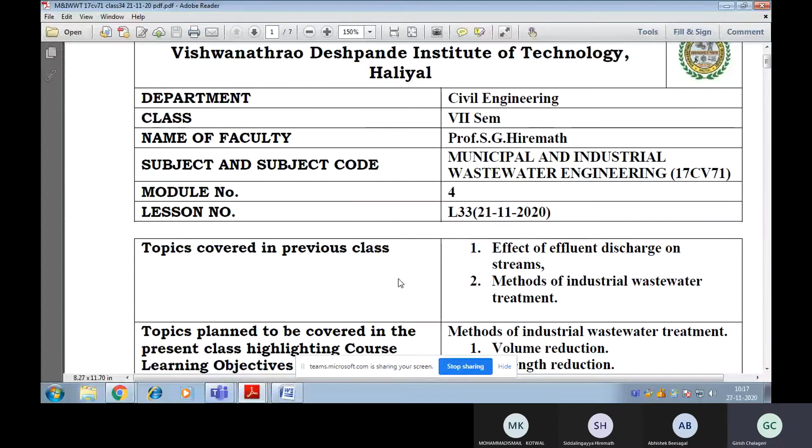So let me start with the topics which we have covered in the last online class. We have discussed the topics which I have posted as notes in your WhatsApp group. In the last class, we discussed the effect of effluent discharge on streams as well as methods of industrial wastewater treatment, that means what is the significance, why the industrial wastewater has to be treated, etc. Today we'll discuss two methods of industrial wastewater treatment: first is volume reduction and second is strength reduction.

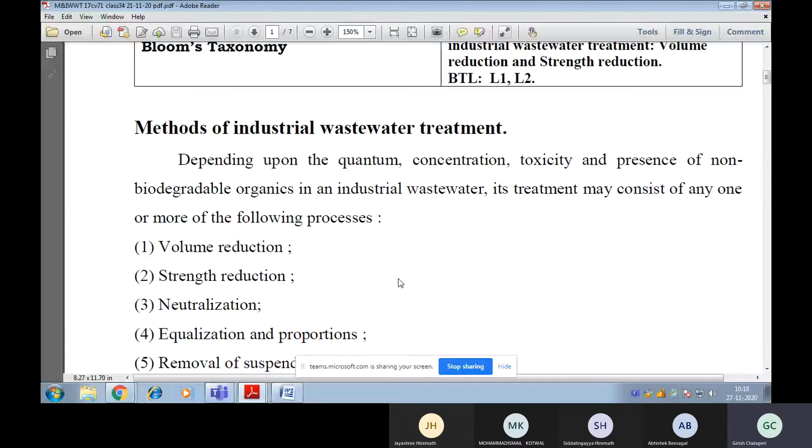Now in detail, we'll discuss the methods of industrial wastewater treatment. Depending upon the quantum, concentration, toxicity and presence of non-biodegradable organics in an industrial wastewater, its treatment may consist of any one or more of the following processes: first, volume reduction; second, strength reduction; third, neutralization; fourth, equalization and proportioning; fifth, removal of suspended solids; sixth, removal of colloidal solids; seventh, removal of inorganic dissolved solids; eighth, removal of organic dissolved solids.

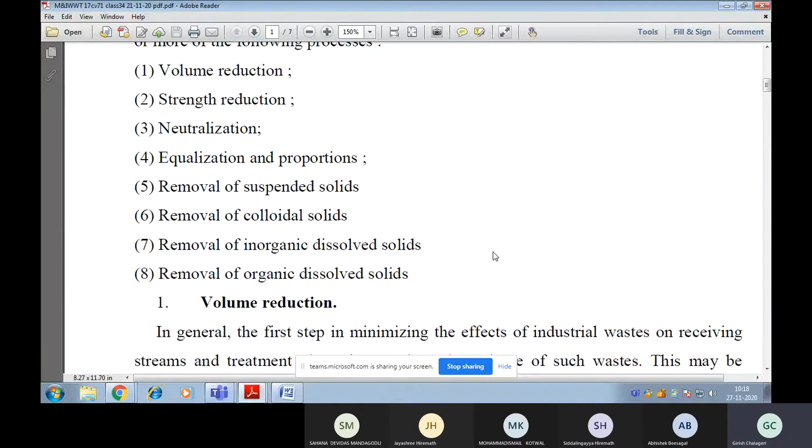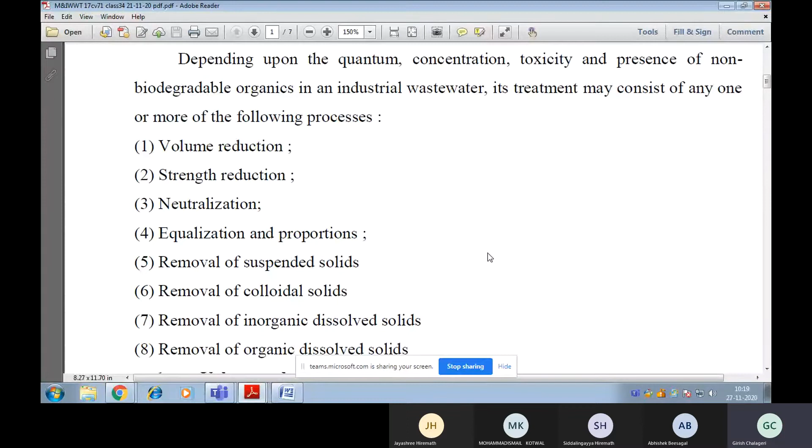As per your syllabus, we have to discuss in detail all these methods of industrial wastewater treatment. As I told you, today we'll discuss two methods, that is volume reduction and strength reduction. Come to volume reduction. In general, the first step in minimizing the effects of industrial waste on receiving streams and treatment plants is to reduce the volume of such waste.

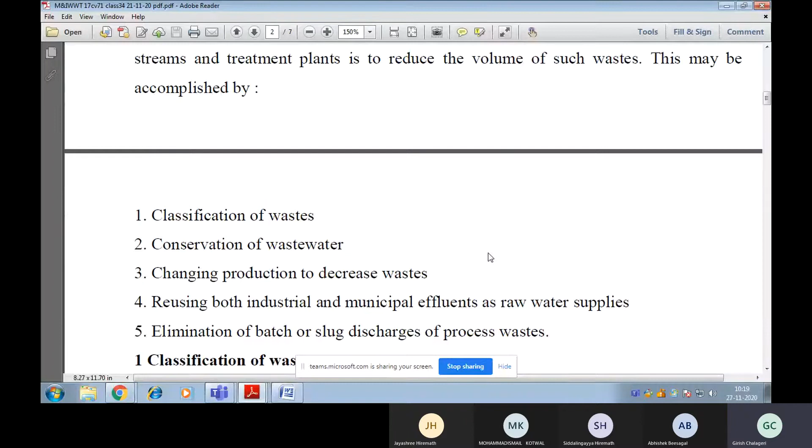This may be accomplished by: first, classification of waste; second, conservation of wastewater; third, changing production to decrease waste; fourth, reusing both industrial and municipal effluents as raw water supplies; fifth, elimination of batch or slug discharges of process wastes. Now we'll discuss in brief all these methods. So come to the first one, that is classification of waste.

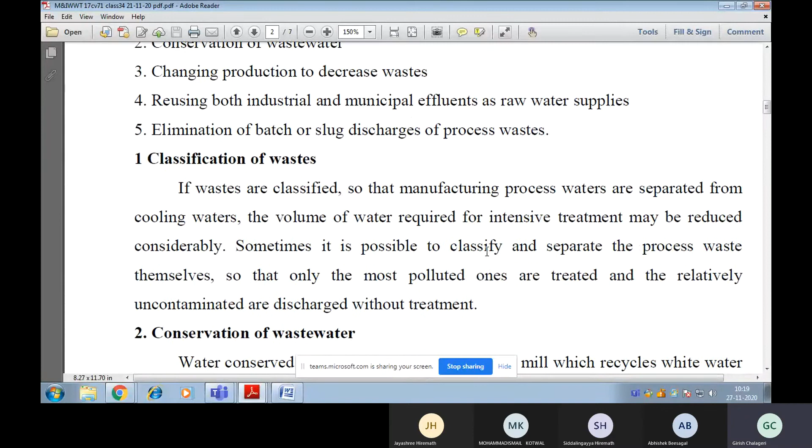If wastes are classified so that the manufacturing process waters are separated from cooling waters, the volume of water required for intensive treatment may be reduced considerably. Sometimes it is possible to classify and separate the process wastes themselves, so that only the most polluted ones are treated and the relatively uncontaminated are discharged without treatment.

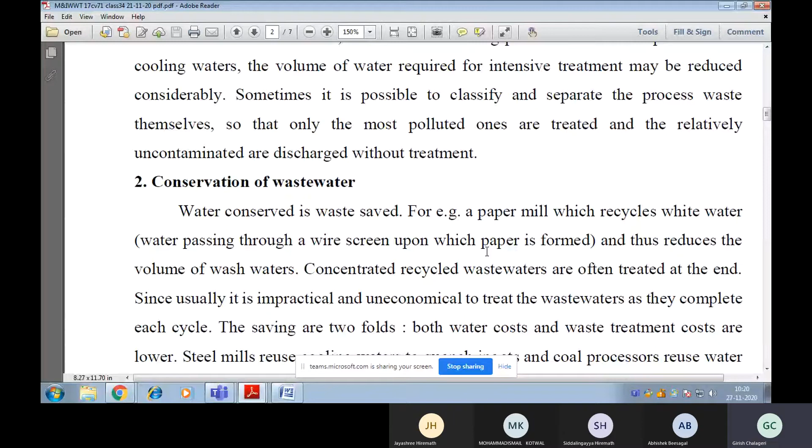Next one is conservation of wastewater. Water conserved is waste saved. For example, a paper mill recycles white water, that is, water passing through a wire screen upon which paper is formed, and thus reduces the volume of wash waters. Concentrated recycled wastewaters are often treated at the end, since usually it is impractical and uneconomical to treat the wastewater as they complete each cycle. The savings are twofold. Both water costs and waste treatment costs are lower.

Steel mills reuse cooling waters to quench ingots, and coal processors reuse water to remove dirt and other non-combustible materials from coal. Now, the third method to reduce the volume is changing production to decrease waste.

Yes, Jayashree Hiremath. Yes, sir. Yeah, is it audible clearly? Yes, sir. Okay, then. Let me continue.

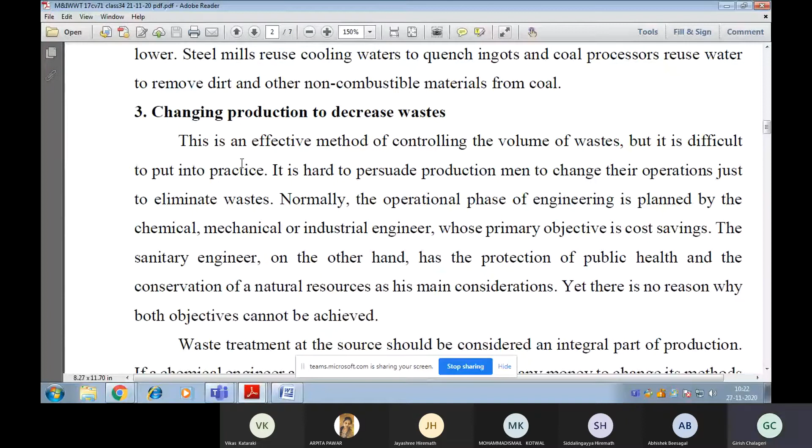So we were discussing volume reduction by changing production to decrease waste. This is an effective method of controlling the volume of waste, but it is difficult to put into practice. It is hard to persuade production men to change their operations just to eliminate waste. Normally, the operational phase of engineering is planned by the chemical, mechanical, or industrial engineer, whose primary objective is cost savings. The sanitary engineer, on the other hand, has the protection of public health and the conservation of natural resources as his main consideration. Yet, there is no reason why both objectives cannot be achieved.

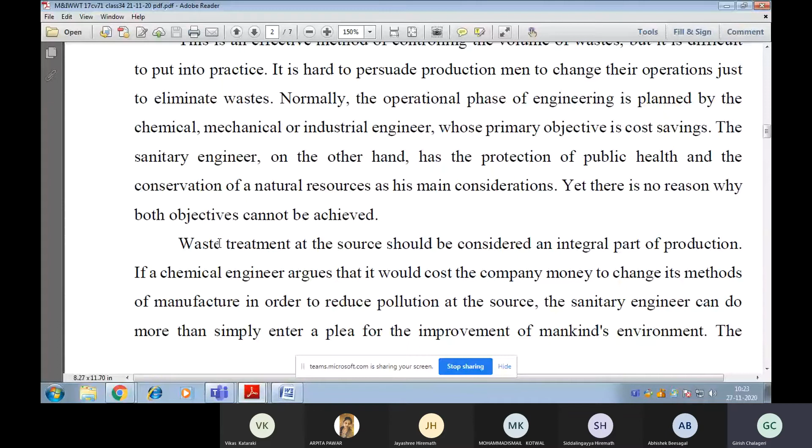Waste treatment at the source should be considered an integral part of production. If it costs the company money to change its method of manufacture in order to reduce pollution at the source, the sanitary engineer can do more than simply enter a plea for the improvement of mankind's environment. The reduction in the amount of sodium sulfite used in dyeing or sodium cyanide used in plating and of other chemicals used directly in production has resulted in both reduction in quantity of wastewater and saving of money.

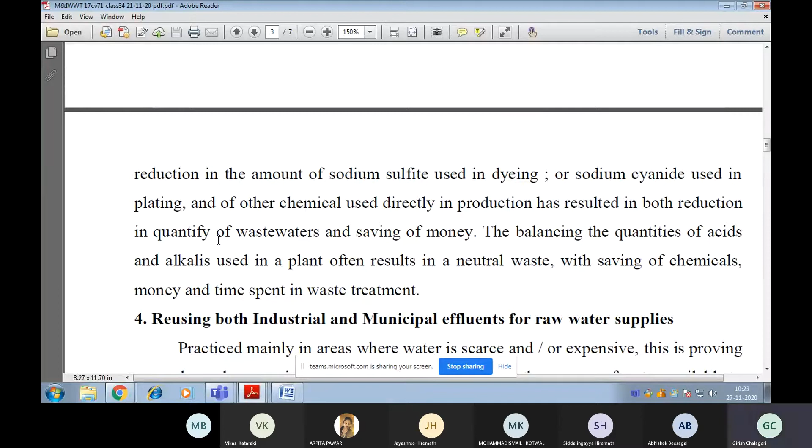Balancing the quantities of acids and alkalis used in the plant often results in neutral waste with saving of chemicals, money and time spent in waste treatment. The fourth method of reducing the volume is reusing both industrial and municipal effluents for raw water supplies.

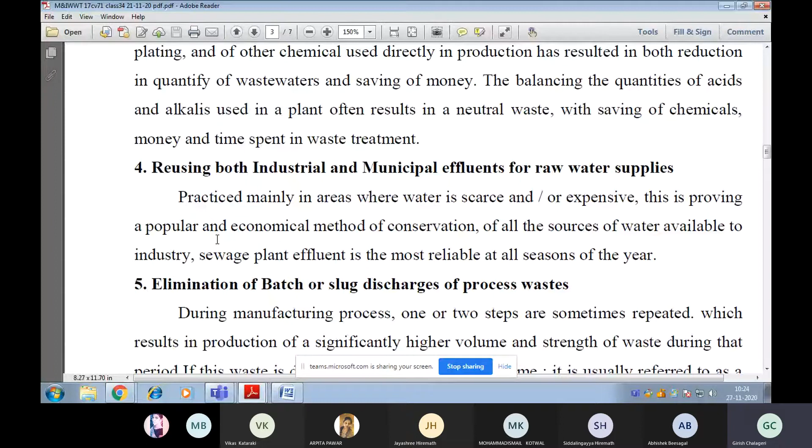It is practiced mainly in areas where water is scarce and or expensive. This is proving a popular and economical method of conservation. Of all the sources of water available to industry, sewage plant effluent is the most reliable at all seasons of the year.

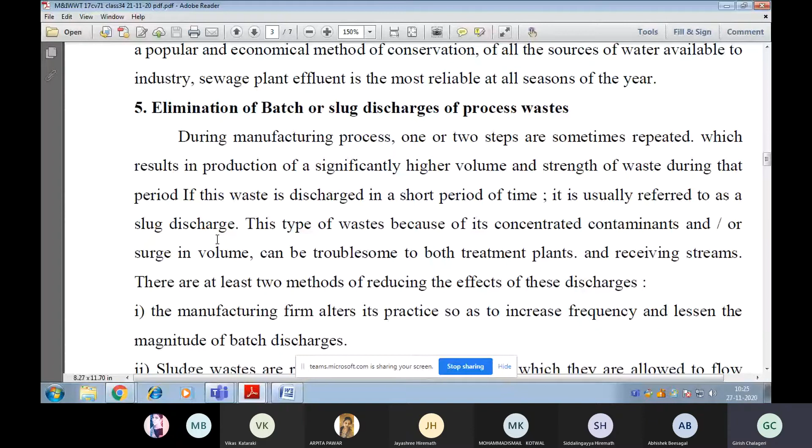Fifth method of reducing the volume is elimination of batch or slug discharges of process waste. During manufacturing process, one or two steps are sometimes repeated, which results in production of a significantly higher volume and strength of waste during that period. If this waste is discharged in a short period of time, it is usually referred to as a slug discharge. This type of waste, because of its concentrated contaminants and or surge in volume, can be troublesome to both treatment plants and receiving streams.

There are two methods of reducing the effects of these discharges. First, the manufacturing firm alters its practice so as to increase the frequency and lessen the magnitude of batch discharges. Secondly, slug wastes are retained in holding basins from which they are allowed to flow continuously and uniformly over an extended period. This particular period may be considered as 24 hours.

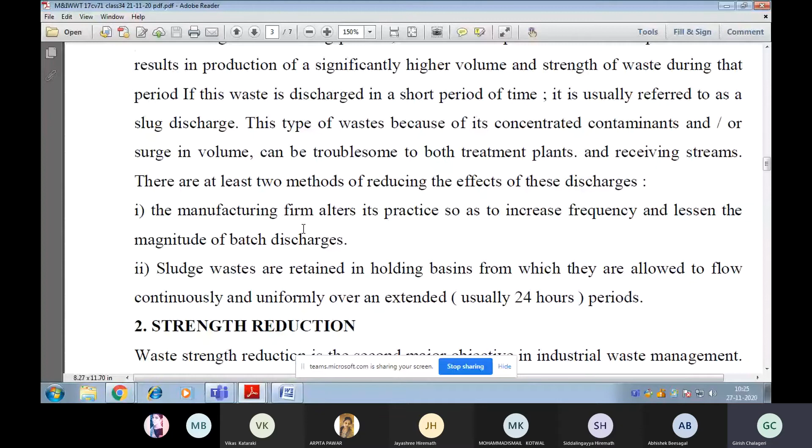So now come to the next method of treating the industrial wastewater, that is strength reduction. Waste strength reduction is the second major objective in industrial waste management. The strength of the waste can be reduced by the following methods. First is process change. Second is equipment modification. Third is segregation of waste.

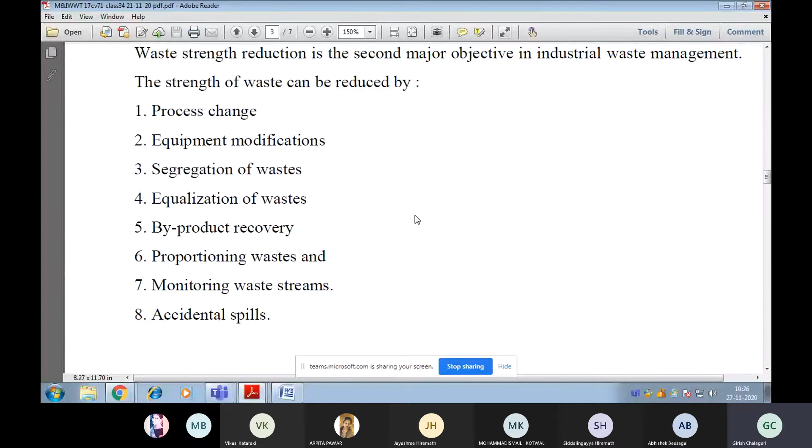Fourth is equalization of waste. Fifth is byproduct recovery. Sixth is proportioning waste. Seventh is monitoring waste streams. Eighth is accidental spills. Now we'll discuss in brief about all these methods of reducing the strength. As I told you, the first method is process change.

Let's have a break. Wait. Now, yes, Arpita Pawar. Yes, sir. Is it audible? Yes, clearly, sir. Okay then. Let me continue.

Okay, so we are discussing the first method of reducing the strength of industrial wastewater, that is process change. Many industries have resolved waste problems through process change, for example, textile and metal fabricating industries. Textile finishing mills are faced with a problem of disposal of highly polluted waste from sizing, desizing, and dyeing processes. Starch has been traditionally used as a sizing agent. This starch, after hydrolysis, becomes a major source of waste pollutants.

A new substitute for starch, carboxymethyl cellulose, has been developed to solve the above problem, which has reduced BOD value significantly. In the metal plating industry, several changes in the process have been suggested to eliminate or reduce cyanide strength. First is change from copper cyanide plating solution to acid copper solution. Second is replace the copper cyanide strike before the copper bath with a nickel strike. Third is substitute H3PO4 for H2SO4 in pickling of steel.

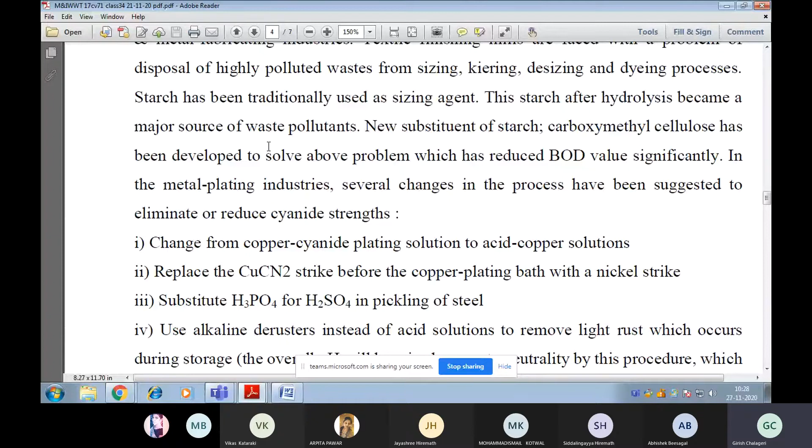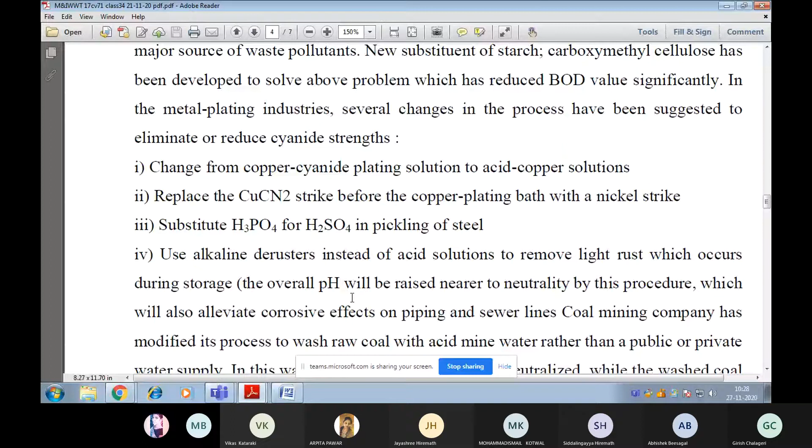Now, fourth is use alkaline derusters instead of acid solutions to remove light rust which occurs during storage. So the overall pH will be raised nearer to neutrality by this process, which will also alleviate corrosive effects on piping and sewer lines. A coal mining company has modified its process to wash raw coal with acid mine water rather than a public or private water supply. In this way, the mine drainage waste is neutralized, while the washed coal is free from any impurities.

The second method of reducing the strength of the wastewater is done by modifying the equipment, or equipment modification. With this also we can reduce the strength of the industrial wastewater. Changes in equipment can effect a reduction in the strength of the waste, usually by reducing the amounts of contaminants entering the waste stream. For example, in pickle factories, screens placed over the drain lines in the tanks prevent the escape of seeds and pieces of vegetables and fruits, which add to the strength and density of waste. Similarly, traps on the discharge pipeline in poultry plants prevent emission of feathers and pieces of fat.

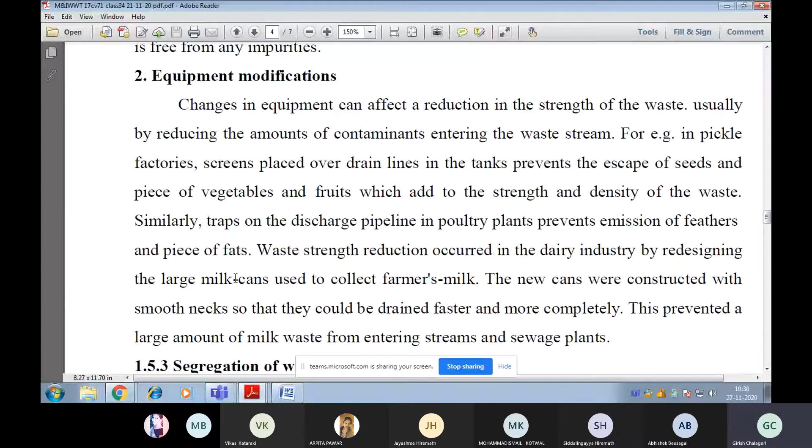Waste strength reduction occurred in the dairy industry by redesigning the large milk cans used to collect farmers' milk. The new cans were constructed with smooth necks so that they could be drained faster and more completely. This prevented a large amount of milk waste from entering streams and sewage plants. And third is segregation of waste. Using this also we can reduce the strength.

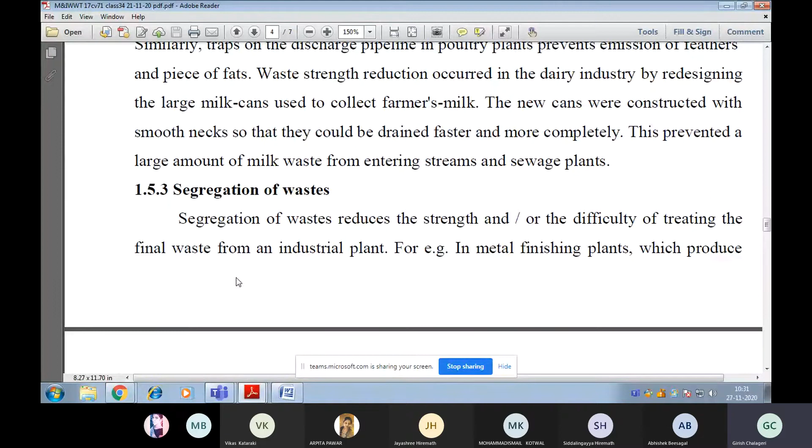Segregation of waste reduces the strength and or the difficulty of treating the final waste from an industrial plant. For example, in metal finishing plants, which produce waste containing both chromium and cyanide as well as other metals, it is necessary to segregate the cyanide bearing waste, make them alkaline, and oxidize them. The chromium waste, on the other hand, have to be acidified and reduced.

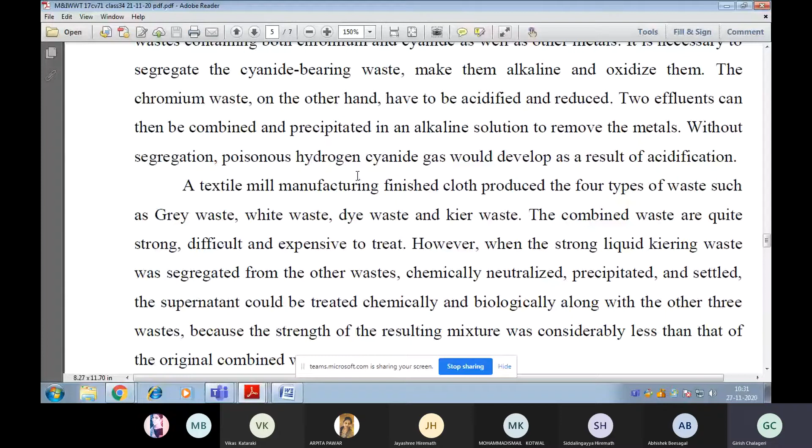The two effluents can then be combined and precipitated in an alkaline solution to remove the metals. Without segregation, poisonous hydrogen cyanide gas would develop as a result of acidification.

A textile mill manufacturing finished cloth produces four types of waste, such as grey waste, white waste, dye waste, and kier waste. The combined waste are quite strong, difficult, and expensive to treat. However, when the strong liquid kiering waste was segregated from the other waste, chemically neutralized, precipitated, and settled, the supernatant could be treated chemically and biologically along with the other three waste because the strength of the resulting mixture was considerably less than that of the original combined waste.

So this is how to reduce the strength of the industrial wastewater. The next method to reduce the strength is equalization of waste. The main objectives of equalization are stabilization of pH, BOD, and settling of solids and heavy metals. Plants which have many products from a diversity of processes prefer to equalize their waste. This requires holding basins for a certain period of time, depending on the time taken for the repetitive processes in the plant. For example, if a manufactured item requires a series of operations that take 8 hours, the plant needs an equalization basin designed to hold the waste for that 8 hour period.

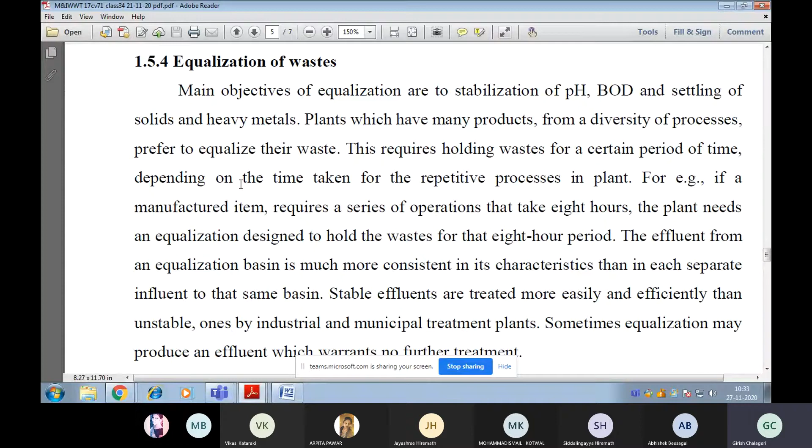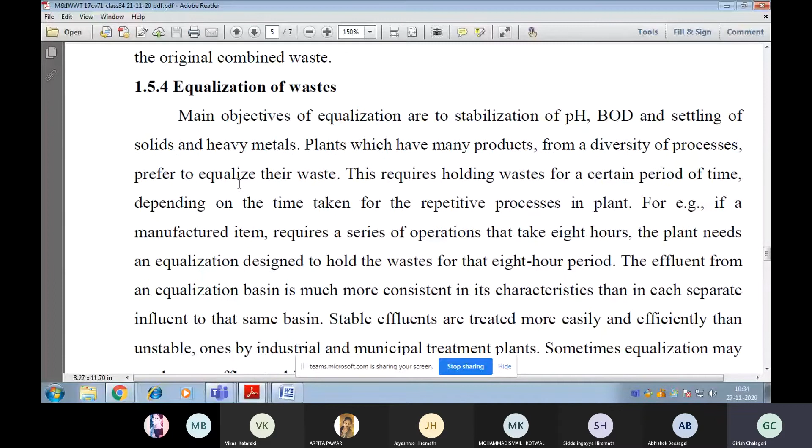The effluent from an equalization basin is much more consistent in its characteristics than each separate influent to that same basin. Stable effluents are treated more easily and efficiently than unstable ones by industrial and municipal treatment plants. Sometimes equalization may produce an effluent which warrants no further treatment. Now, we'll discuss equalization of waste in detail in the next class.

The fifth method used to reduce the strength of the industrial wastewater is byproduct recovery. This is the utopian aspect of industrial waste treatment, the one phase of this entire problem which may lead to economic gains. The industrial management should consider the possibility of building a recovery plant which will produce a marketable byproduct and at the same time solve a troublesome waste problem.

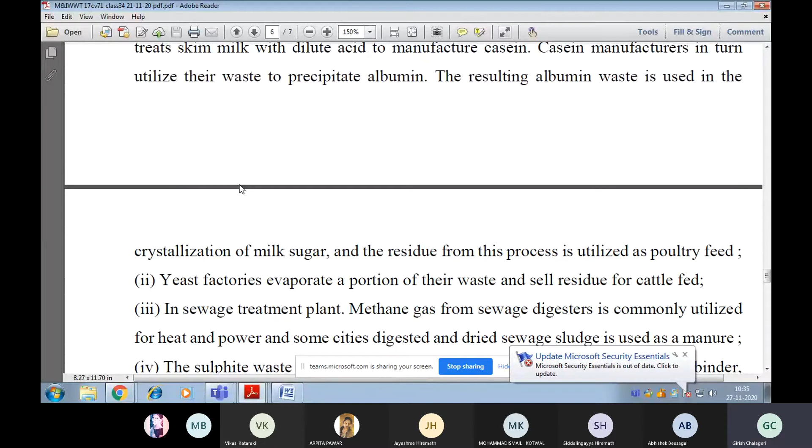For example, the dairy industry treats skim milk with dilute acid to manufacture casein. Casein manufacturers in turn utilize their waste to precipitate albumin. The resulting albumin waste is used in the crystallization of milk sugar, and the residue from this process is utilized as poultry feed. Second, yeast factories evaporate a portion of their waste and sell the residue for cattle feed.

Third, in sewage treatment plants, methane gas from the sewage digester is commonly utilized for heat and power, and in some cities digested and dried sewage sludge is used as a manure. The sulfite waste liquor byproducts from paper mills are used in fuel, road binder, cattle fodder, fertilizer, insulating compounds, and in production of alcohol and artificial vanillin.

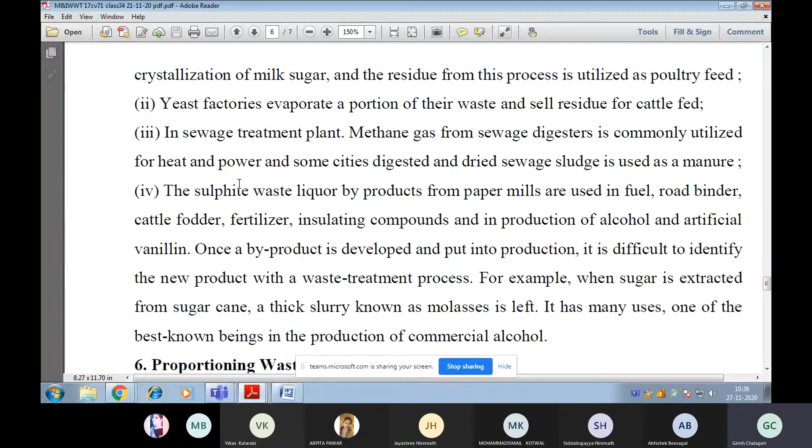Once a byproduct is developed and put into production, it is difficult to identify the new product with a waste treatment process. For example, when sugar is extracted from sugarcane, a thick slurry known as molasses is left. It has many uses, one of the best known being the production of commercial alcohol, that is ethyl alcohol.

The next method of reducing the strength is proportioning waste. By proportioning its discharge of concentrated waste into the main sewer, a plant can often reduce the strength of its total waste to the point where it will need a minimum of final treatment or will cause the least damage to the stream or treatment plant. We'll discuss it in detail in the subsequent chapters of the module.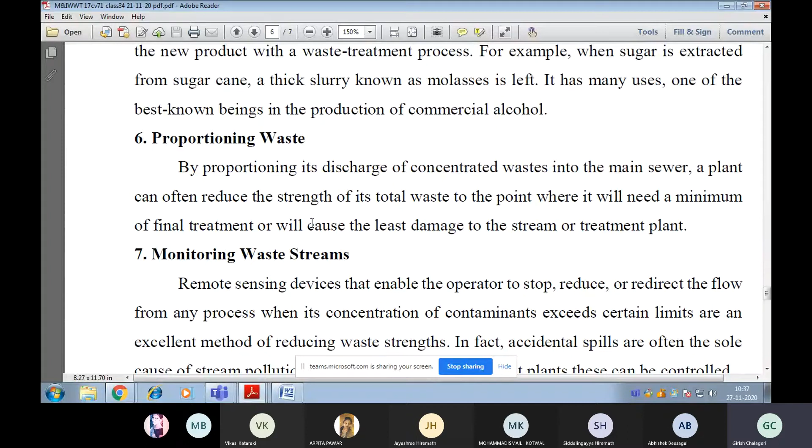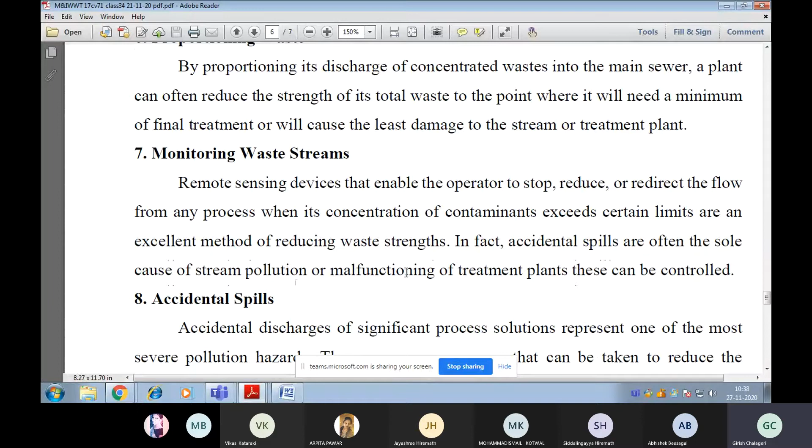So the seventh method of reducing the strength is monitoring waste streams. Remote sensing devices that enable the operator to stop, reduce, or redirect the flow from any process when its concentration of contaminants exceeds certain limits are an excellent method of reducing waste strength. In fact, accidental spills are often the sole cause of stream pollution or malfunctioning of treatment plants. These can be controlled.

The eighth method of reducing the strength is accidental spills. Accidental discharges of significant process solutions represent one of the most severe pollution hazards. There are some measures that can be taken to reduce the likelihood of accidents and their severity when and if they occur. Some suggestions for general use include:

First, make certain that all pipelines and valves in the plant are clearly identified. Secondly, allow only certain knowledgeable persons to operate these valves. Third, install indicators and warning systems for leaks and spills. Fourth, provide for detention of spilled wastewater in holding basins or lagoons until proper waste treatment can be accomplished.

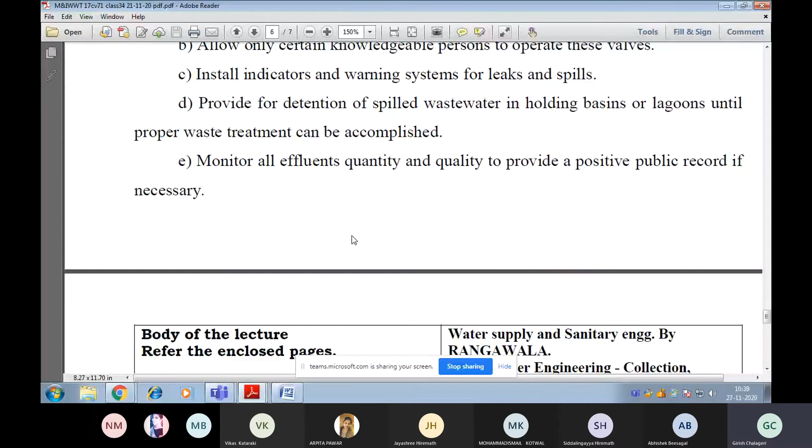Last, monitor all effluents' quantity and quality to provide a positive public record if necessary. These notes which we have discussed are prepared by referring to these references. You will get the copies on the net or in our library. Go through these books if you want more information about the topics I have discussed.

Now, what is the significance of these topics? These topics are very important in sanitary engineering, in municipal services, and also when working as a consulting environmental engineer. Questions may be asked like this: what advantage do we get by reducing the waste volume? What do you mean by strength reduction? Why should we use it? Such questions may be asked in the examination.

Now, Manjunath, yes, Bhimanalli. Manjunath, Manjunath SB. Yes, Sudha. Hello. Yes, sir. Is it audible? Yes, sir. Audible, sir. Okay then. Let me continue.

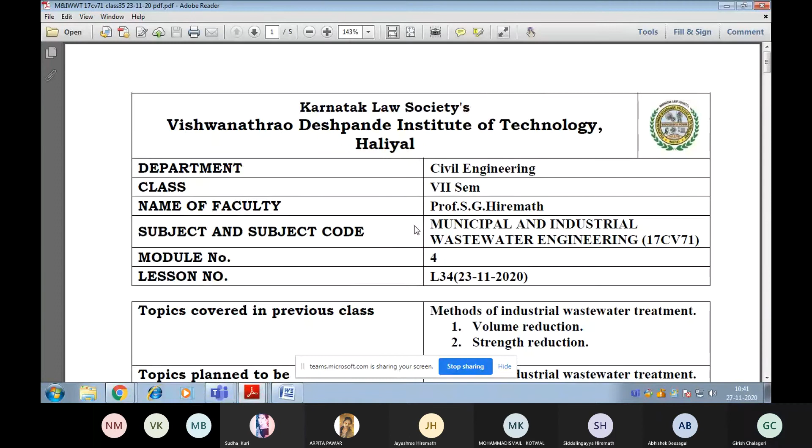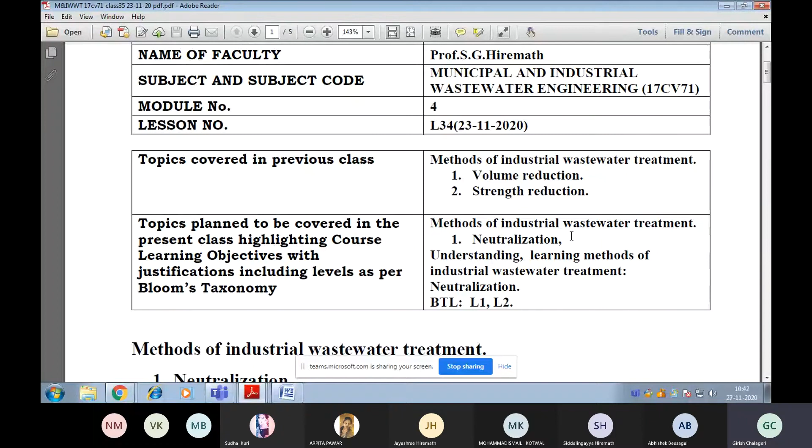As I told you, in the notes posted on 23/11/2020 we have discussed one of the methods of industrial wastewater treatment, that is neutralization. You can go through the notes posted on 23/11/2020. In the previous class we covered volume reduction and strength reduction. As we have only one online class per week, I will discuss the notes posted in the WhatsApp group over the last 3 to 4 classes. Today we'll discuss another method of treating industrial wastewater, that is neutralization.

Acid or alkaline waste should not be discharged without treatment into a receiving stream. There are many acceptable methods for neutralizing excess acidity or alkalinity of wastewater: first, mixing wastes; second, limestone treatment for acid waste; third, lime slurry treatment for acid waste; fourth, caustic soda treatment for acid waste; fifth, waste boiler flue gas; sixth, carbon dioxide treatment for alkaline waste; seventh, producing carbon dioxide in alkali waste; and sulfuric acid treatment for alkaline waste.

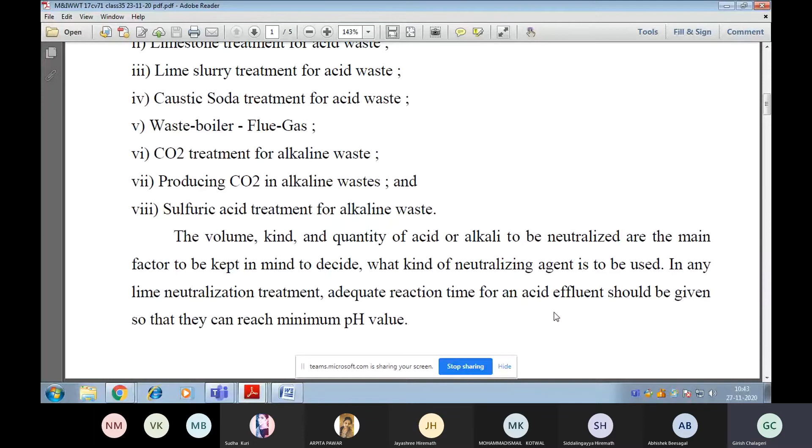The volume, kind, and quantity of acid or alkali to be neutralized are the main factors to keep in mind when deciding what kind of neutralizing agent is to be used. In any lime neutralization treatment, adequate reaction time should be given for an acid effluent so that it can reach the minimum pH value. Now we'll discuss in brief all these methods of neutralization.

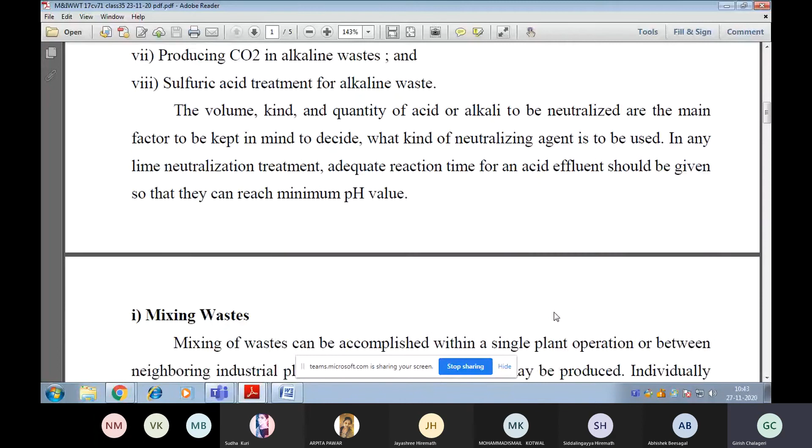The first one is mixing wastes. Mixing of wastes can be accomplished within a single plant operation or between neighboring industrial plants. Acid and alkali wastes may be produced individually within one plant, and proper mixing of these wastes at the appropriate time results in neutralization. For example, if one plant produces an alkaline waste which can be pumped conveniently to an area adjacent to a plant discharging an acid waste, an economical and feasible system of neutralization results for each plant.

The second one is limestone treatment for acid waste. In this method, acid wastes are passed through beds of limestone, that is calcium carbonate, at a rate of about 1 gallon per minute per square foot, that is 1 GPM per square foot. Neutralization takes place with the following reaction: calcium carbonate reacts with sulfuric acid, converting into calcium sulfate and H2CO3. This reaction will continue as long, just a second.

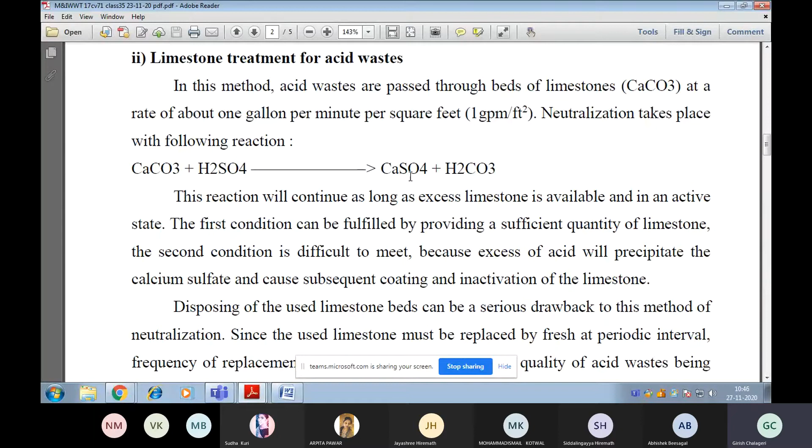inactivation of the limestone. Disposing of the used limestone beds can be a serious drawback to this method of neutralization, since the used limestone must be replaced by fresh at periodic intervals, frequency of replacement depending on the quantity and quality of acid waste being passed through a bed. When there are extremely high acid loads, foaming may occur, especially if organic matter is also present in the waste.

Third method of neutralization is lime slurry treatment for acid waste. Mixing acid waste with lime slurries is an effective procedure for neutralization. The reaction is similar to that obtained with limestone beds, but the advantages of using lime slurry over limestone beds are: first, in this case lime is used up continuously because it is converted to calcium sulfate, which is carried out in the waste.

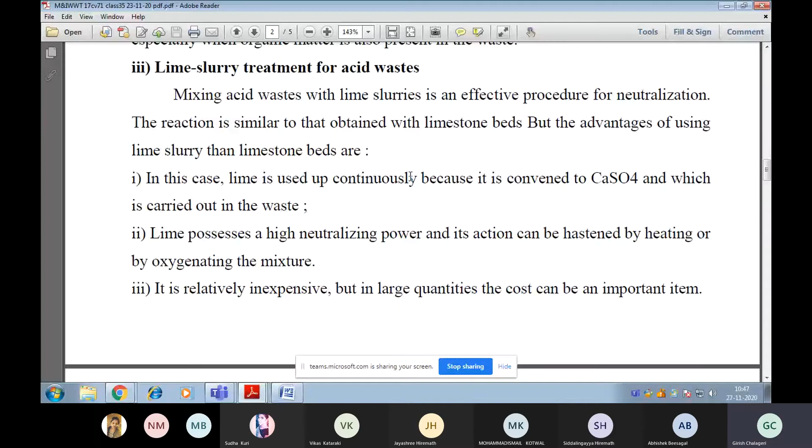Second, lime possesses a high neutralizing power and its action can be hastened by heating or by oxygenating the mixture. Third, it is relatively inexpensive, but in large quantities the cost can be an important item.

Neutralization of nitric and sulfuric acid waste in concentrations up to about 1.5%, that is in case of sulfuric acid, H2SO4, was accomplished satisfactorily by using a burned dolomite stone containing 47.5% calcium oxide, 34.3% magnesium oxide and 1.8% calcium carbonate.

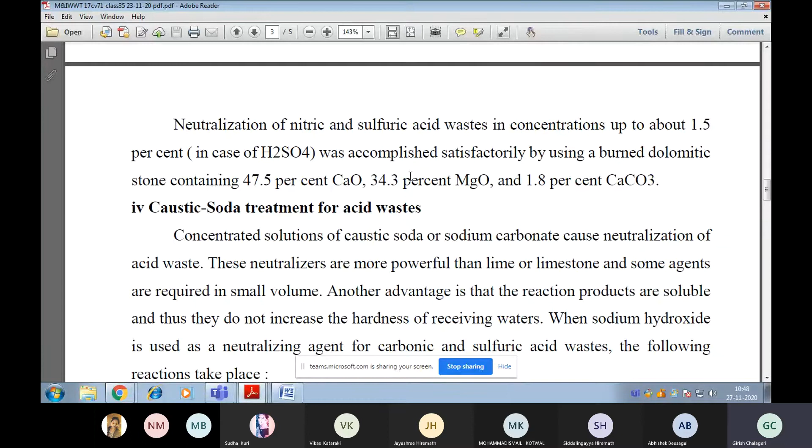So next method of neutralization is caustic soda treatment for acid waste. Concentrated solutions of caustic soda or sodium carbonate cause neutralization of acid waste. These neutralizers are more powerful than lime or limestone, and the agents are required in small volume. Another advantage is that the products are soluble and thus they do not increase the hardness of receiving waters.

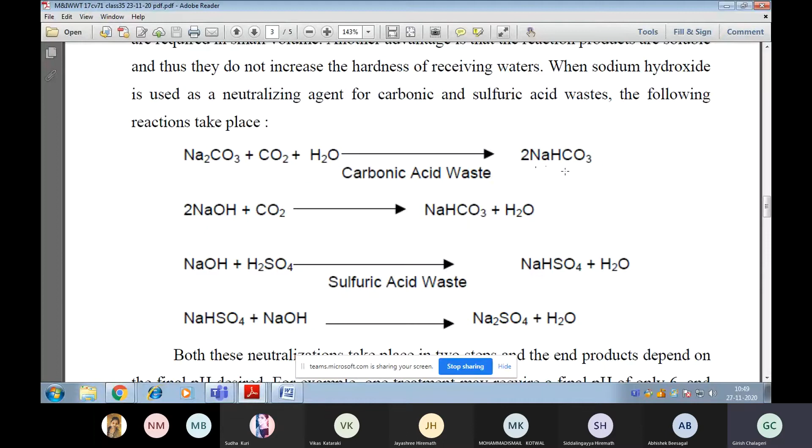When sodium hydroxide is used as a neutralizing agent for carbonic and sulfuric acid waste, the following reactions take place. Just you can go through them. Sodium carbonate plus CO2 plus H2O, that is carbonic acid waste, will give 2NaHCO3. So just you can go through these chemical equations.

Both these neutralizations take place in two steps, and end products depend on the final pH desired. For example, one treatment may require a final pH of only 6 and most of the end product is sodium bisulfate. Another treatment may require a pH of 8 with most of the product being Na2SO4, that is sodium sulfate.

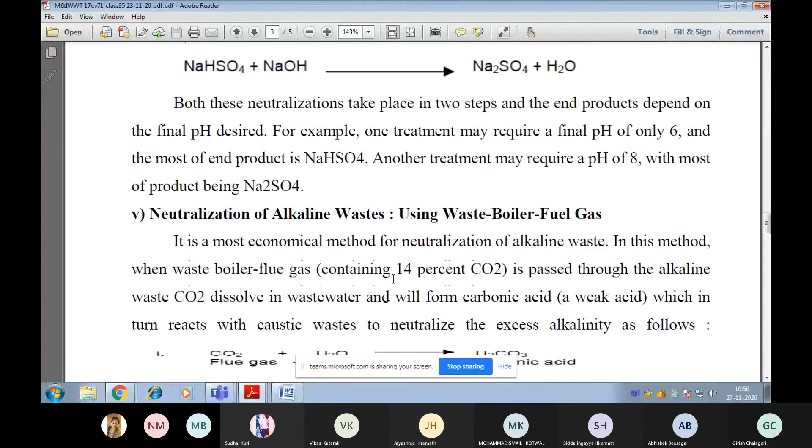Now next method of neutralization is neutralization of alkaline waste using waste boiler flue gas. It is the most economical method for neutralizing alkaline waste. In this method, when waste boiler flue gas containing around 14% carbon dioxide is passed through the alkaline waste, CO2 dissolves in wastewater and forms carbonic acid, a weak acid, which in turn reacts with caustic waste to neutralize the excess alkalinity as shown in the chemical reaction. So just you can go through these chemical reactions.

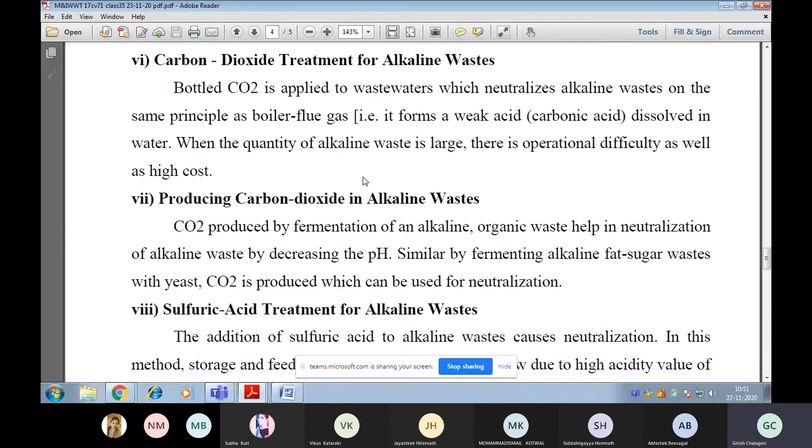So sixth method of neutralization is carbon dioxide treatment for alkaline waste. Bottled carbon dioxide is applied to wastewater, which neutralizes alkaline waste on the same principle as boiler flue gas. That is, there will be formation of a weak acid, carbonic acid, which again reacts with the alkaline part of the wastewater.

Now next method of neutralization is producing carbon dioxide in alkaline waste. Carbon dioxide produced by fermentation of an alkaline organic waste helps in neutralization of alkaline waste by decreasing the pH. Similarly, by fermenting alkaline fat sugar based waste, carbon dioxide is produced, which can be used for neutralization.

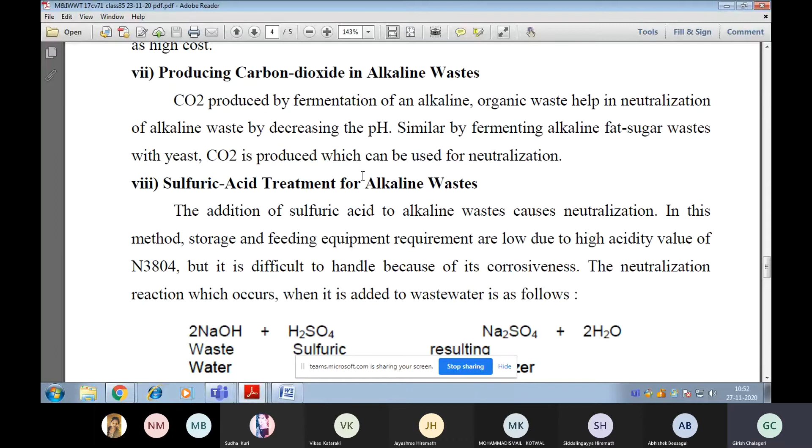So, eighth method is sulfuric acid treatment for alkaline waste. The addition of sulfuric acid to alkaline waste causes neutralization. In this method, storage and feeding equipment requirements are low due to the high acidity value of H2SO4. Sorry, there is a print mistake. But it is difficult to handle because of its corrosiveness. The neutralization reaction which occurs when it is added to wastewater will be as follows.

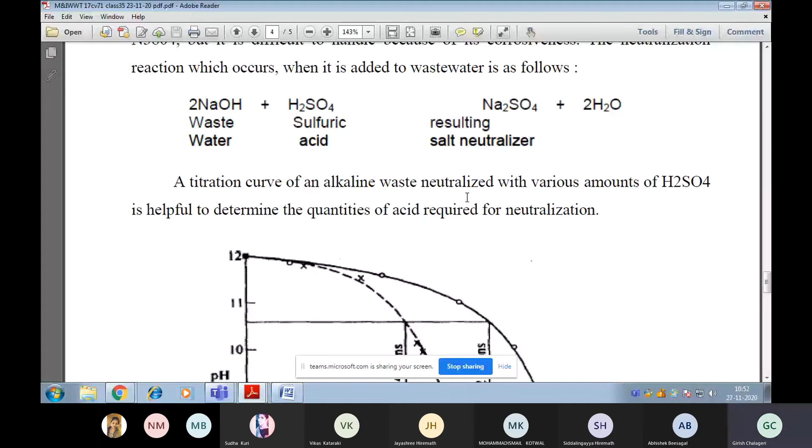Sodium hydroxide plus sulfuric acid will lead to the formation of Na2SO4 and water. A titration curve of an alkaline waste neutralized with various amounts of sulfuric acid is helpful to determine the quantity of acid required for neutralization. This is the titration process. This graph is plotted with the help of trials, taking different mixtures of acid and bases, and we can study the variation of pH when we add acid to the alkaline solution.

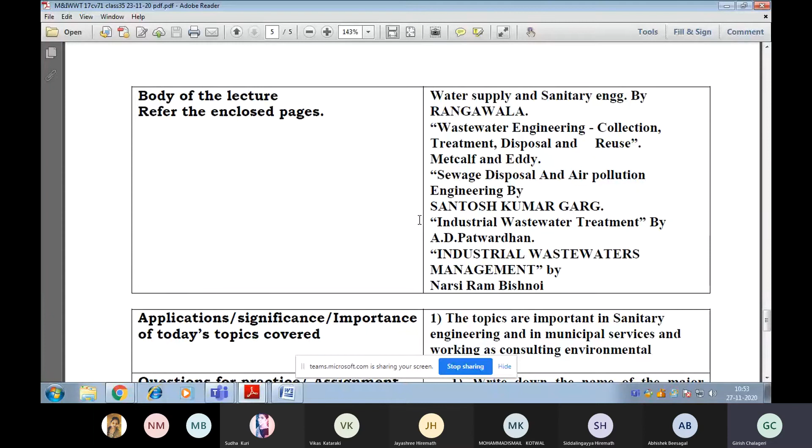So this particular notes is also prepared by referring all these books here. So if you want, you can refer these books if you want any more information about the topic of neutralization. As I told you, these topics are very important in sanitary engineering, municipal services, as well as if you want to work as a consulting environmental engineer.

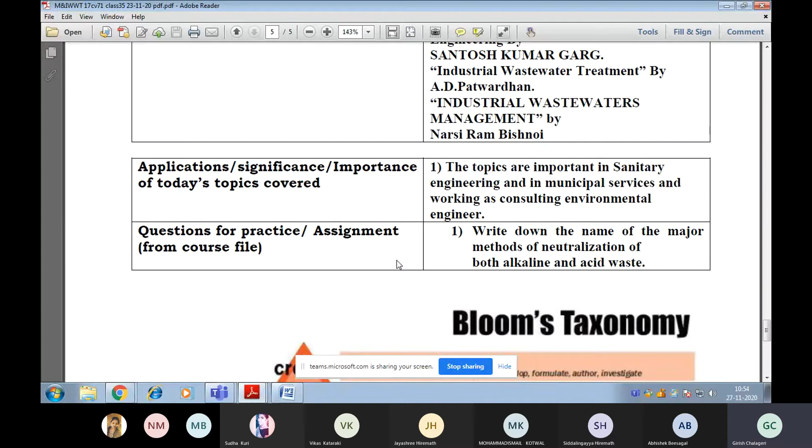The question may be asked like this: write down the name of the major methods of neutralization of both alkaline and acid waste. This particular question may be asked for 6 to 8 marks. Now, let me discuss another method of treating the industrial wastewater.

Yes, because... Yes, sir. Yeah, is it audible clearly? Yes, sir. Okay, then let me continue.

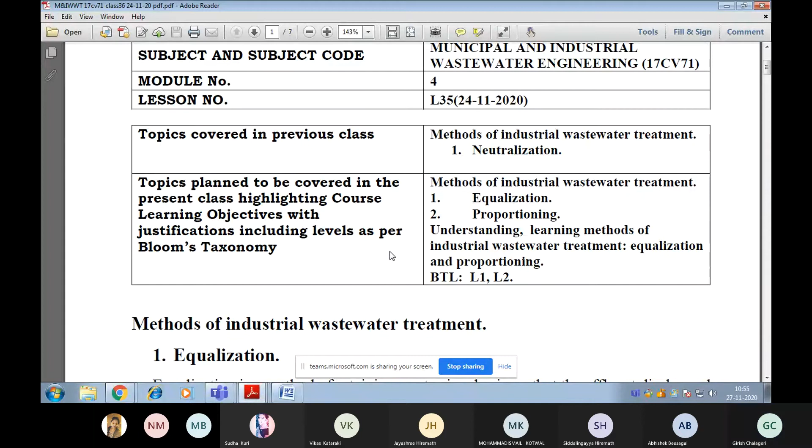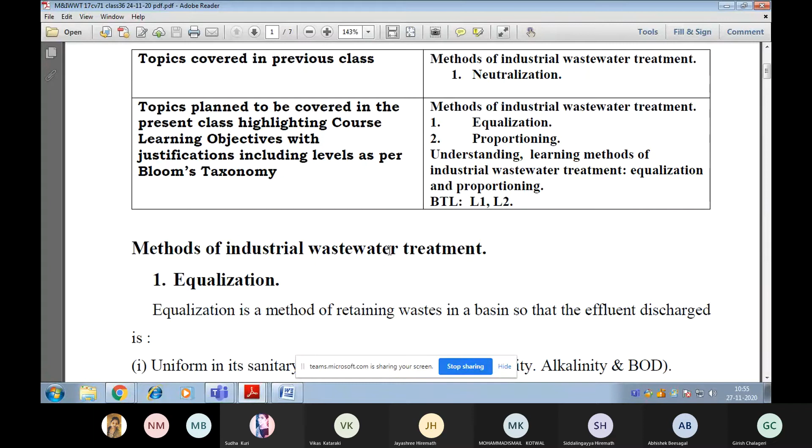So previously we were discussing one of the methods of treating the industrial wastewater, that is neutralization. Let me discuss in brief another two methods of treating the industrial wastewater. The first one is equalization and the second one is proportioning. Let me discuss in brief about equalization.

Equalization is a method of retaining waste in a basin so that the effluent discharge is, first, uniform in its sanitary characteristics. Characteristics considered are pH, color, turbidity, alkalinity, and BOD, that is biological oxygen demand. Secondly, concentration of effluent contaminants is lowered. Third, physical, chemical, and biological reactions take place.

Sometimes air is injected into these basins to provide, first, better mixing, second, chemical oxidation of reduced compounds, third, some degree of biological oxidation, and fourth, agitation to prevent suspended solids from settling. Now come to the objectives of equalization.

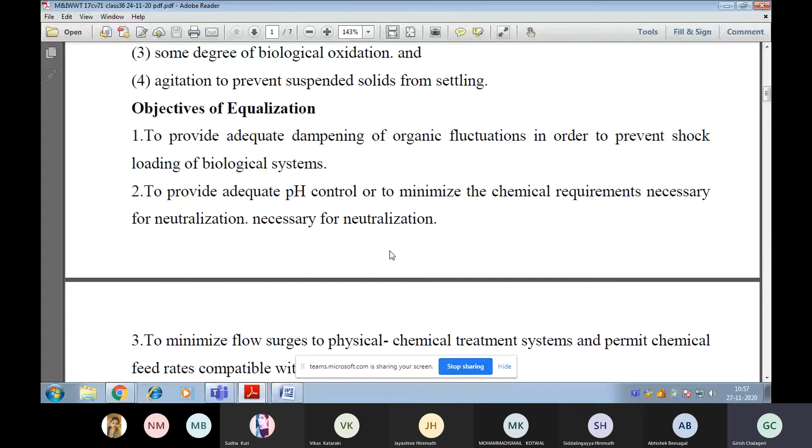Equalization is done to provide adequate dampening of organic fluctuation in order to prevent shock loading of the biological system. Secondly, to provide adequate pH control or to minimize the chemical requirements necessary for neutralization. Third objective is to minimize flow surges to the physical chemical treatment system and permit chemical feed rates compatible with feeding equipment.

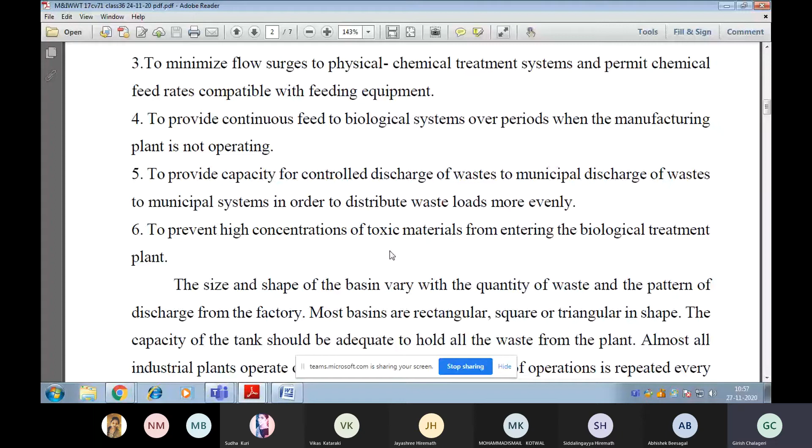Fourth objective is to provide continuous feed to the biological system over periods when the manufacturing plant is not operating. Fifth objective is to provide capacity for controlled discharge of waste to the municipal system in order to distribute waste loads more. Sixth objective is to prevent high concentrations of toxic material from entering the biological treatment plant, which may lead to the death of the microorganisms.

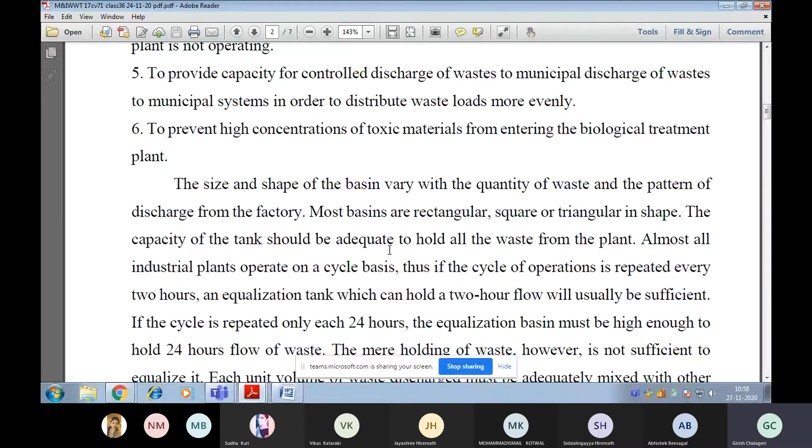The size and shape of the basin vary with the quantity of the waste and the pattern of discharge from the factory. Most basins used for equalization are rectangular, square, or triangular in shape. The capacity of the tank should be adequate to hold all the waste from the plant. Almost all industrial plants operate on a cycle basis.

Thus, if the cycle of operation is repeated every 2 hours, an equalization tank which can hold a 2-hour flow will usually be sufficient. If the cycle is repeated only each 24 hours, the equalization basin must be large enough to hold 24 hours flow of waste. The mere holding of waste, however, is not sufficient to equalize it.

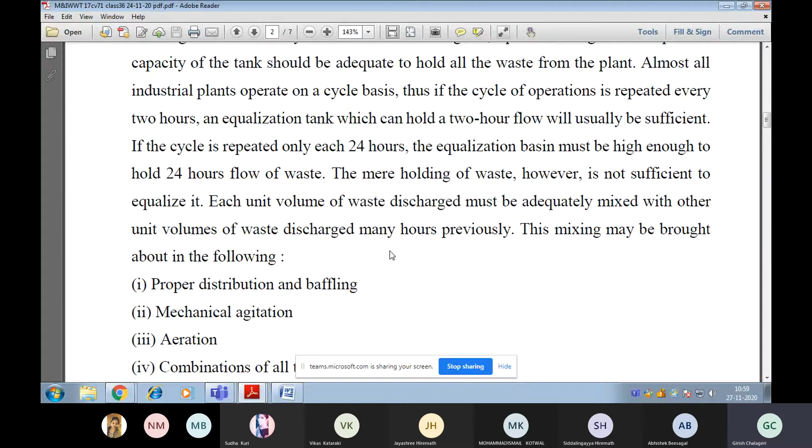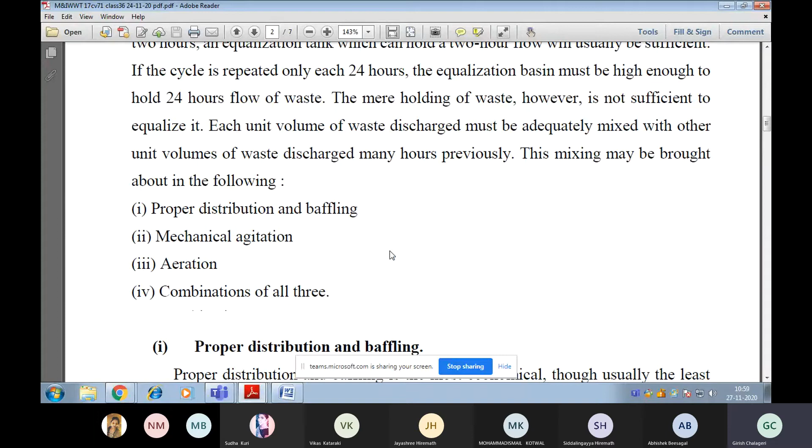Each unit volume of waste discharged must be adequately mixed with other unit volumes of waste discharged many hours previously. This mixing may be brought about in the following ways. First is proper distribution and baffling. Second is mechanical agitation. Third is aeration. And fourth is a combination of all three. So, proper distribution and baffling. What do you mean by this?

Proper distribution and baffling is the most economical, though usually the least efficient, method of mixing. Still, this method may suffice for many plants. Horizontal distribution of the waste is achieved by using either several inlet pipes spaced at regular intervals across the bed of the tank, or perforated pipes across the entire bed.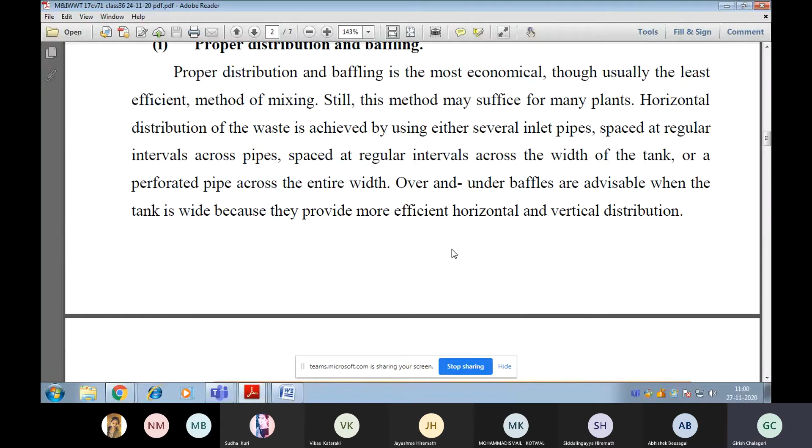Over and under baffles are advisable when the tank is wide because they provide more efficient horizontal and vertical distribution. So this is the line diagram of a baffled equalization tank. The vertical lines show the over and under baffles, this is the entry of influent, and effluent is taken out at this particular point.

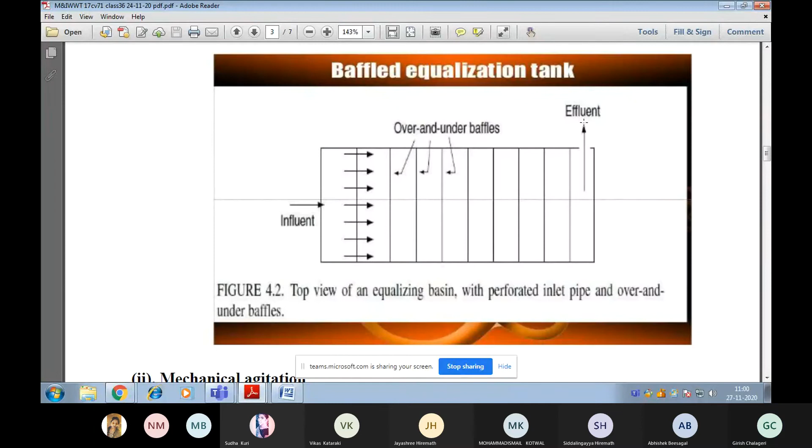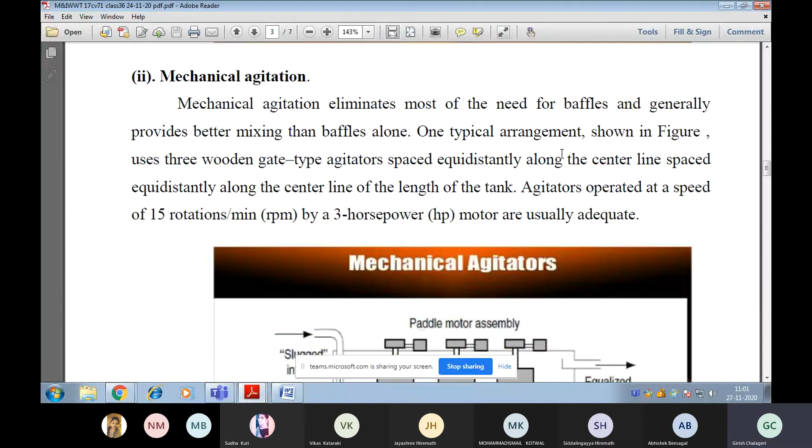Now, the second method is mechanical agitation. Mechanical agitation eliminates most of the need for baffles and generally provides better mixing than baffles alone. One typical arrangement is shown in the following figure. It uses three wooden gate-type agitators spaced equidistantly along the center line of the length of the tank. Agitators operated at a speed of 15 rotations per minute by a 3 horsepower motor are usually adequate.

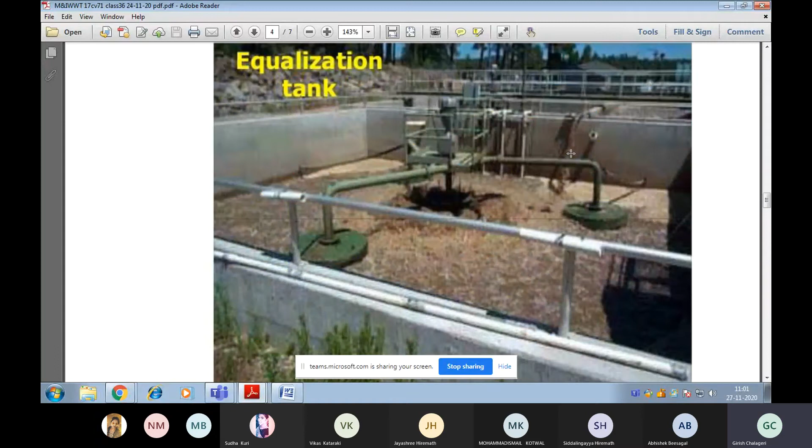So this is how we can provide the mechanical agitators for the process of equalization of waste. This is the side view of an equalization basin with a mechanical agitator instead of baffles. Agitation means mixing. Okay. So this is the pictorial view of the equalization tanks. This is a kind of equalization tank again. You can see such arrangements in the industries.

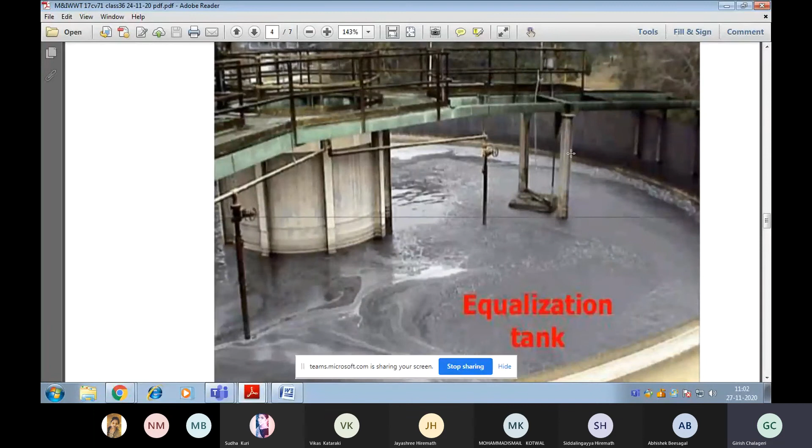Now come to the next method of treating industrial wastewater, that is proportioning. Proportioning means the discharge of industrial waste in proportion to the flow of municipal sewage in sewers. In most cases, it is possible to combine equalization and proportioning in the same vessel. The objective of proportioning in sewers is to keep constant the percentage of industrial waste to domestic sewage flow entering the municipal sewage plant. This procedure has several other purposes also.

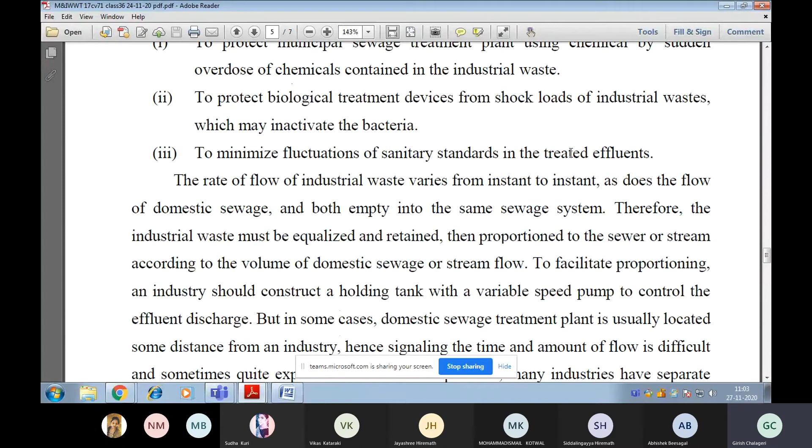First among them is to protect a municipal sewage treatment plant using chemicals from a sudden overdose of chemicals contained in the industrial waste. Second, to protect biological treatment devices from shock loads of industrial waste which may inactivate the bacteria. Third, to minimize fluctuation of sanitary standards in the treated effluents.

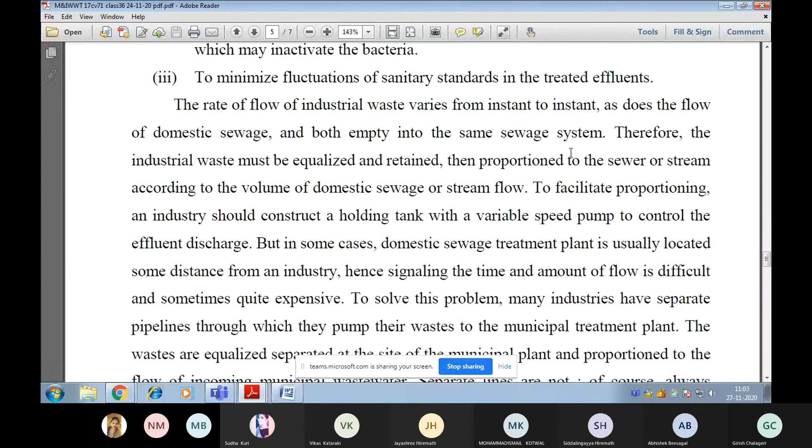The rate of flow of industrial waste varies from instant to instant, as does the flow of domestic sewage, and both empty into the same sewage system. Therefore, the industrial waste must be equalized and retained, then proportioned to the sewer or stream according to the volume of domestic sewage or stream flow. To facilitate proportioning, an industry should construct a holding tank with a variable speed pump to control the effluent discharge.

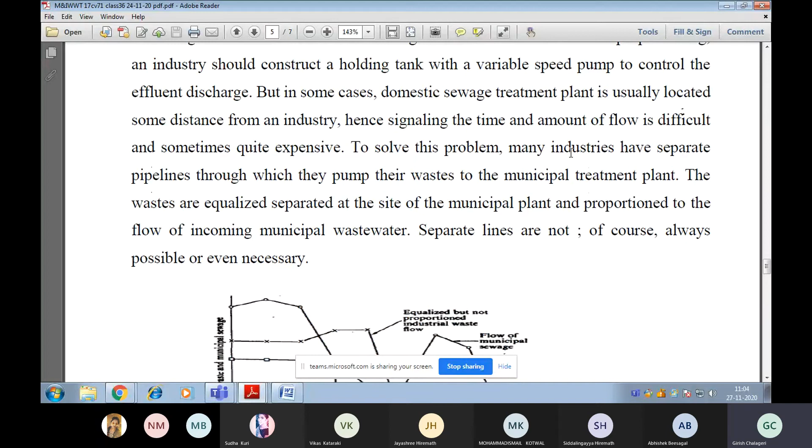But in some cases, the domestic sewage treatment plant is located some distance from an industry, hence signaling the time and amount of flow is difficult and sometimes quite expensive. To solve this problem, many industries have separate pipelines through which they pump their waste to the municipal treatment plant. The wastes are equalized, separated at the site of the municipal plant and proportioned to the flow of incoming municipal wastewater. Separate lines are not, of course, always possible or even necessary. So this is the graphical representation of the mixing of industrial wastewater with domestic discharge in the STP, that is, sewage treatment plant.

Now come to the methods of proportioning. There are two general methods of discharging industrial waste in proportion to the flow of domestic sewage at the municipal plant. First among them is manual control related to a well-defined domestic sewage flow pattern. Manual control is lower in initial cost but less accurate. It involves determining the flow pattern of domestic sewage for each day of the week over a period of months. Usually, one does this by examining the flow records of the sewage plant or by studying hourly water consumption figures for the city.

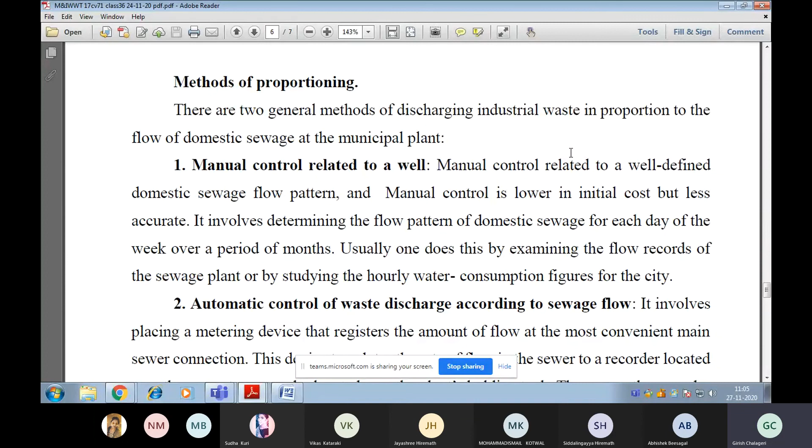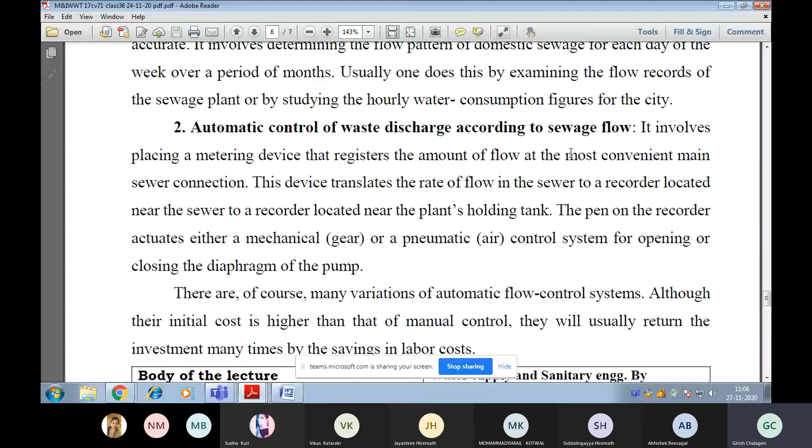Apart from this, we can also use another method, that is automatic control of waste discharge according to sewage flow. It involves placing a device that registers the amount of flow in the most convenient main sewer connection. This device translates the rate of flow in the sewer to a recorder located near the plant's holding tank. The pen on the recorder actuates either a mechanical, that is gear, or a pneumatic, that is air, control system for opening or closing the diaphragm of the pump. There are, of course, many variations of automatic flow control systems. Although their initial cost is higher than that of manual control, they will usually return the investment many times by the savings in labor cost.

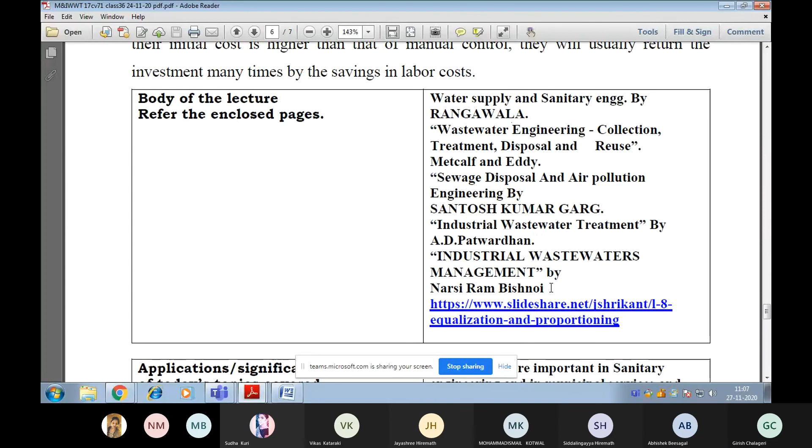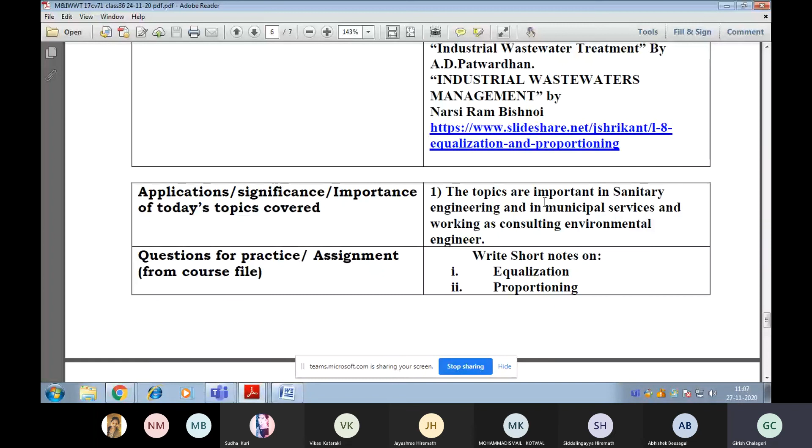So these notes are also written using books as well as referring to websites. These topics are very important in sanitary engineering, municipal services, as well as if you want to work as a consulting environmental engineer. A question in the examination may be asked to write short notes on equalization and proportioning.

Okay. Any doubt in the topics? Yes, Jayashree Hiremath, is there any doubt? No, sir.

Okay, then let me conclude this class, and in the next online class we will discuss another method of treating industrial wastewater, that is removal of organic solids, and also the removal of inorganic solids, colloidal solids, and other topics which I will cover from the 27th to the coming first week of December.